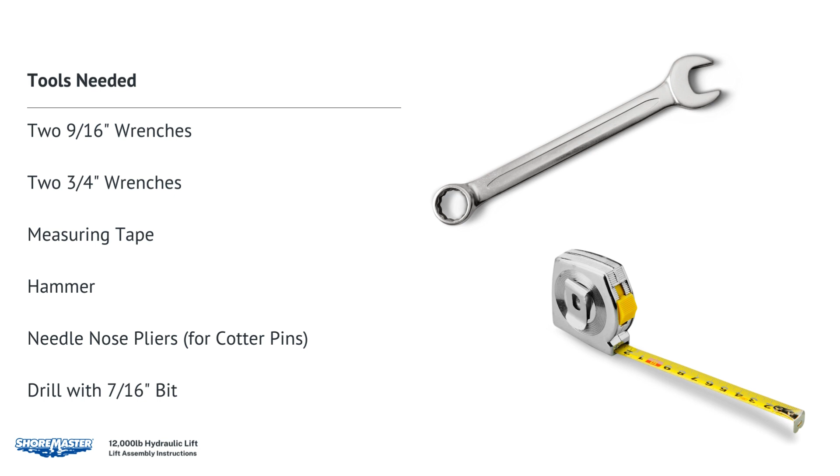Frame assembly instructions. Fully read and understand each step before proceeding. The following tools will be needed for assembling the lift: two 9/16 inch wrenches, two 3/4 inch wrenches, measuring tape, hammer, needle nose pliers for cotter pins, and a drill with a 7/16 inch bit.

Install all 4 leg posts into foot pads. Secure using one 3/8 by 4 hex bolt and one 3/8 brass nut in each place.

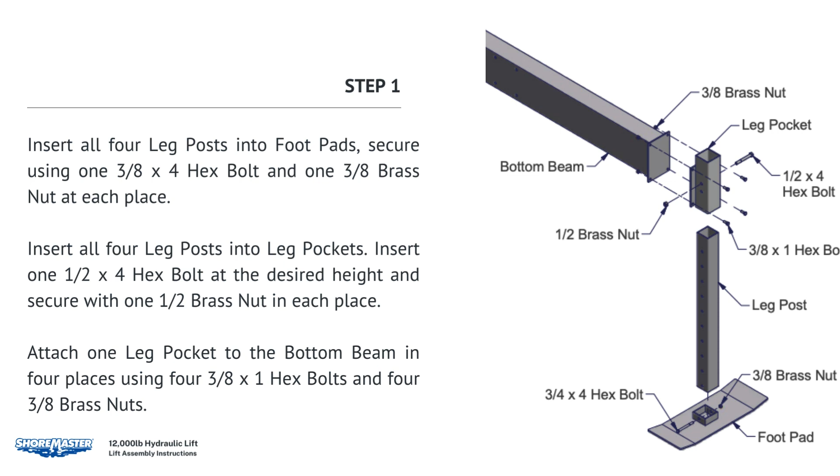Insert all 4 leg posts into leg pockets. At the desired height, insert one 1/2 by 4 hex bolt and secure with one 1/2 brass nut in each place. Attach one leg pocket to the bottom beam in 4 places using 4 3/8 by 1 hex bolts and 4 3/8 brass nuts.

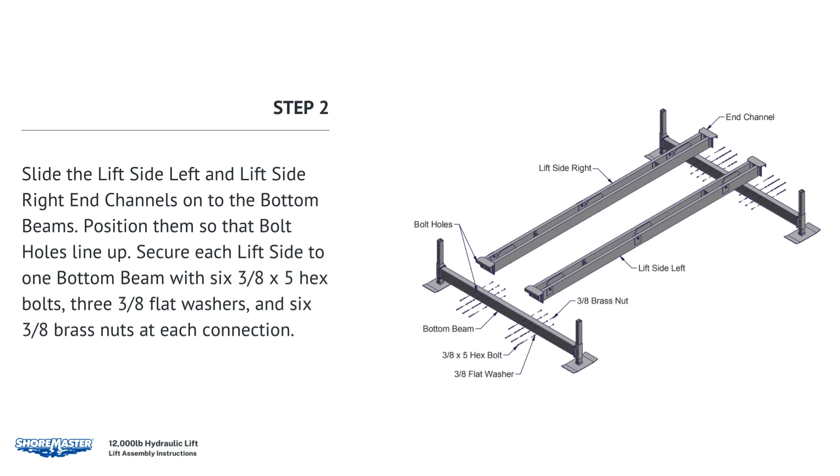Slide the lift side left and lift side right end channels onto the bottom beams. Position them so that the bolt holes line up. Secure each lift side to one bottom beam with 6 3/8 by 5 hex bolts, 3/8 flat washers, and 6 3/8 brass nuts at each connection.

Attach the I-beams to the proper lift sides using 2 5.5 inch pins for each I-beam. Insert one 5/32 by 1 1/2 cotter pin into each pin and bend with needle nose pliers.

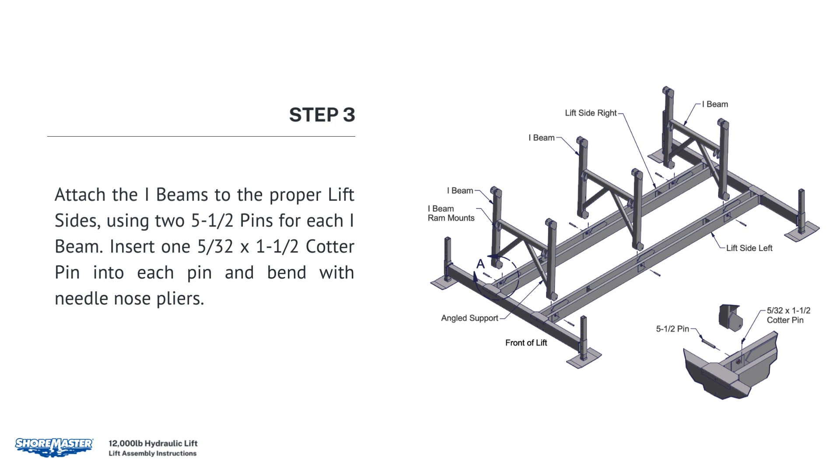Pin the base of each hydraulic cylinder to the lift side ram mounts using one 6.0 pin and one 5/32 by 1 1/2 cotter pin in 6 places. Bend cotter pins with needle nose pliers after installation.

Pin the top of each hydraulic cylinder to the I-beam ram mounts using one 4.5 pin and one 5/32 by 1 1/2 cotter pin in 6 places. Bend cotter pins with needle nose pliers after installation.

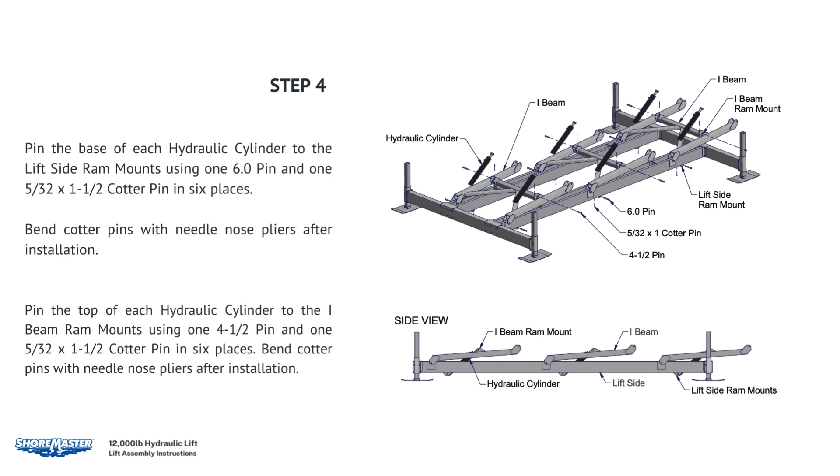Attach each rack side to the I-beams using 2 5.5 pins and 2 5/32 by 1 1/2 cotter pins. Bend cotter pins with needle nose pliers after inserting.

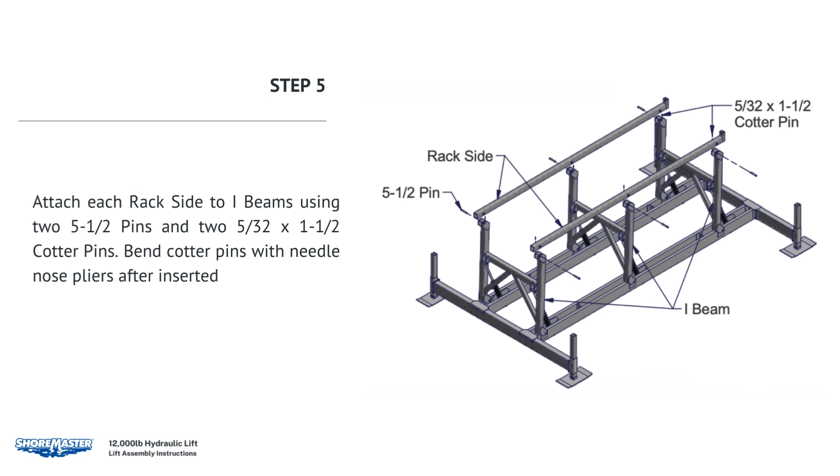Slide each V-rack onto the rack sides. One 7/16 inch hole will need to be drilled in the rack side for each V-rack connector channel. Secure with one 3/8 by 4 bolt and one 3/8 brass nut in each place.

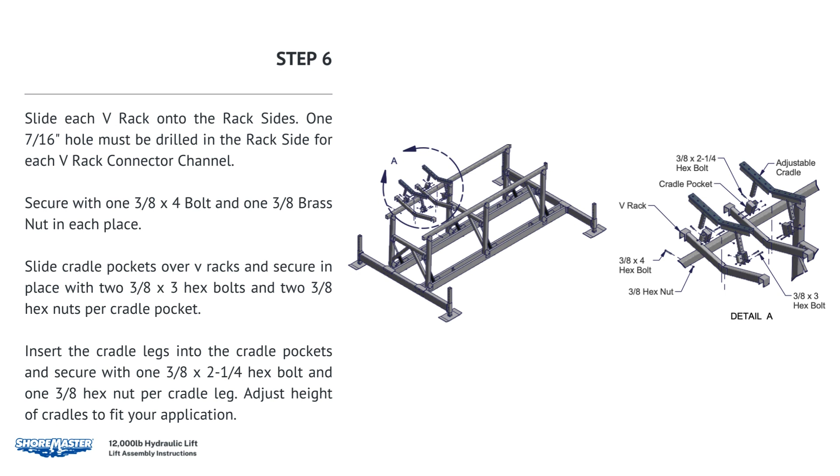Slide cradle pockets over V-racks and secure in place with 2 3/8 by 3 hex bolts and 2 3/8 hex nuts per cradle pocket. Insert the cradle legs into the cradle pockets and secure with one 3/8 by 2 1/4 hex bolt and one 3/8 hex nut per cradle leg. Adjust the height of the cradles to fit your application.

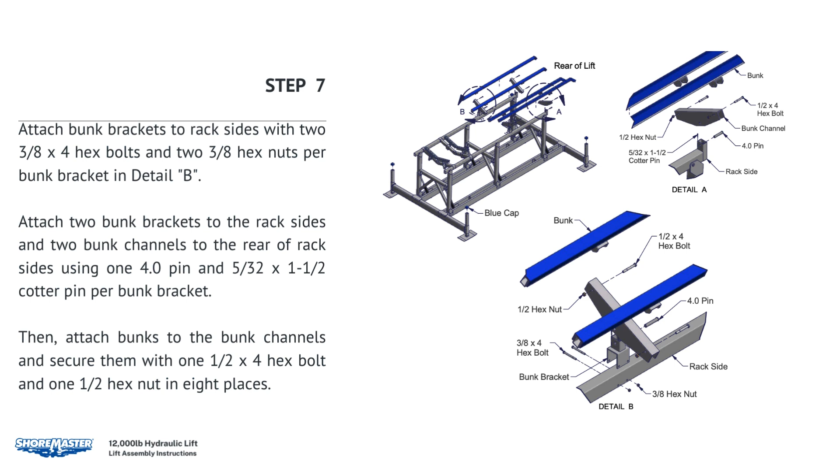Then attach bunks to the bunk channels and secure with one 1/2 by 4 hex bolt and one 1/2 hex nut in 8 places.

Installation instructions. Situations will widely vary between installation sites. ShoreMaster recommends that your dealer or other trained boat lift installer train you and perform the initial installation. The following are guidelines or suggestions for installation.

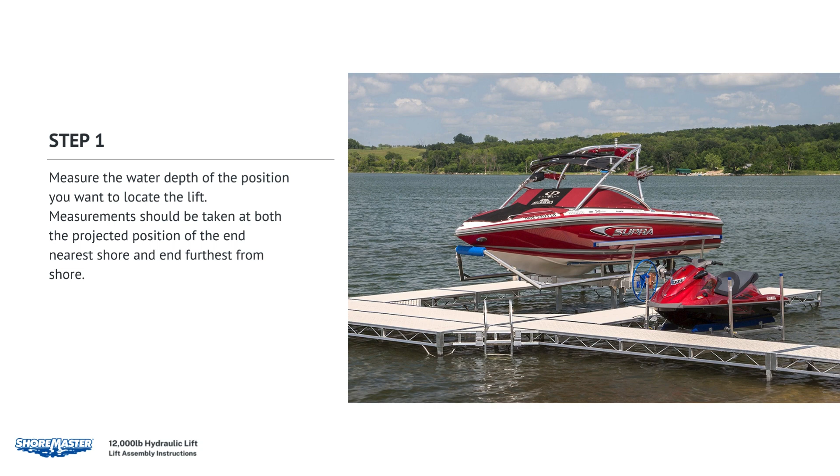Measure the water depth at the position you want to locate the lift. Measurements should be taken at both the projected position of the end nearest shore and the end furthest from shore.

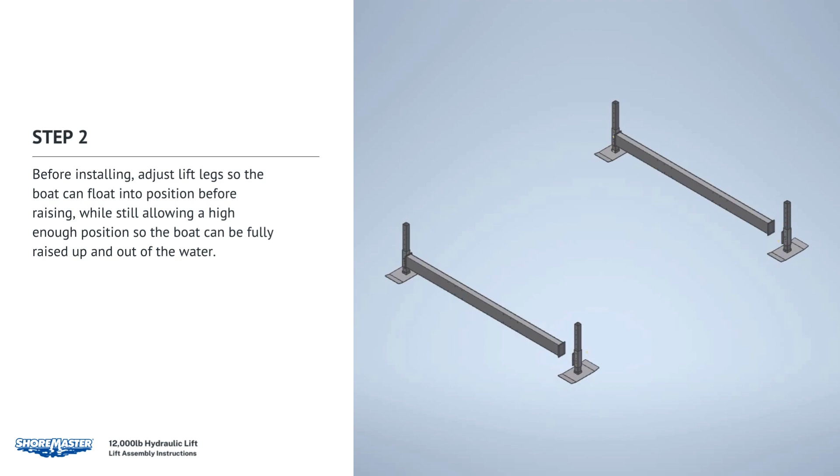Before installing, adjust the lift legs so that the boat can float into position before raising, while still allowing a high enough position so that the boat can be fully raised up and out of the water.

Carefully place the lift into position alongside the dock so that the hydraulic pump and operating controls can easily be set on the dock. Ask your dealer about a wheel caddy unit to allow your lift to be rolled into position.

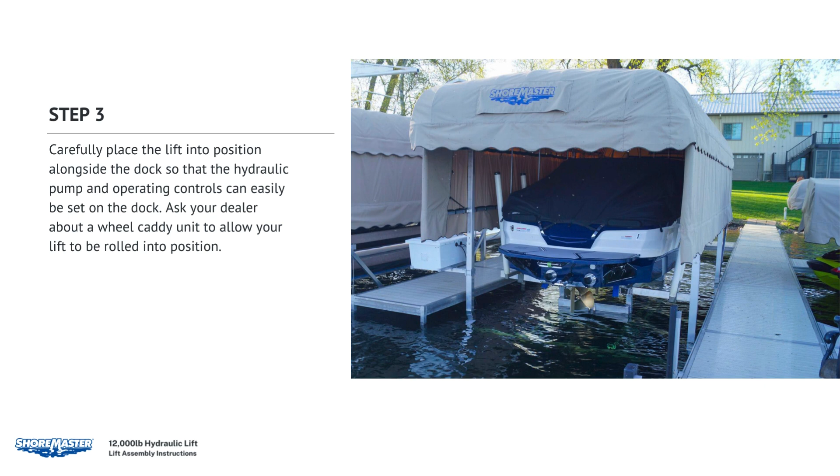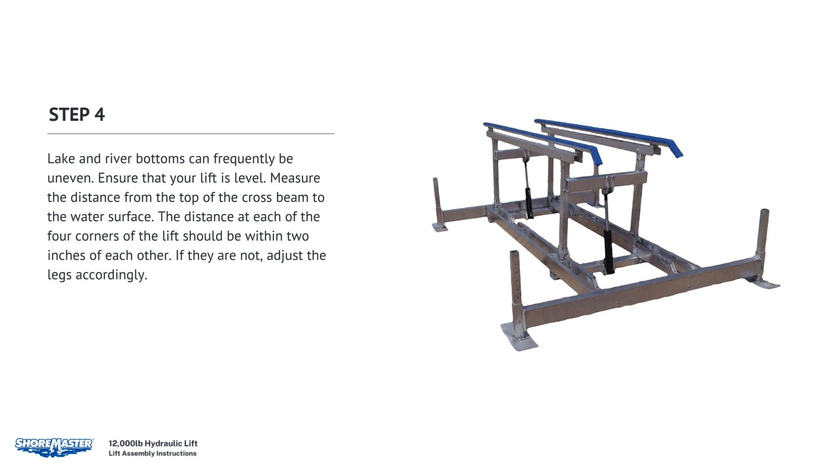Lake and river bottoms can frequently be uneven. Ensure that your lift is level. Measure the distance from the top of the crossbeam to the water surface. The distance at each of the four corners of the lift should be within 2 inches of each other. If they are not, adjust the legs accordingly.

After loading and operating the lift, following the operating instructions. Remove the boat and recheck that the lift remains level.

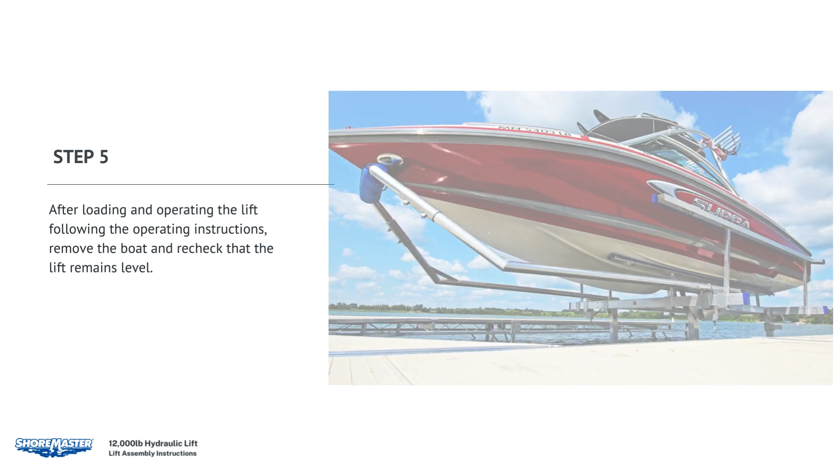Operating instructions. Now that you have installed and leveled the lift, you are ready to raise your boat for the first time. Prior to use, see to it that anyone who may use the lift looks upon the unit not as a toy, but as a piece of heavy equipment that deserves your respect and good judgment.

Before allowing anyone to operate the lift, be sure they fully understand the proper operating procedure. Do not exceed maximum capacity of the lift. Overloading may cause mechanical failure and serious personal injury. Do not allow anyone who is in the water within 6 feet of the lift. Do not allow anyone on, in, or under the lift while operating.

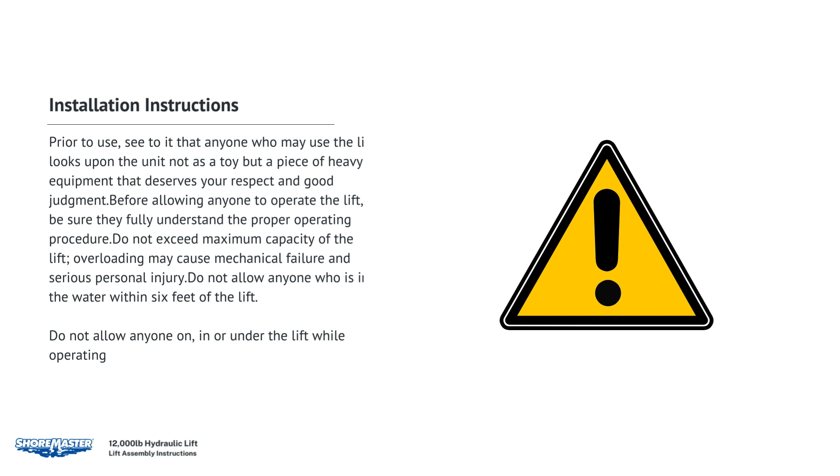When operating the lift, the following procedures must be adhered to. Be sure the cradles or bunks, sold separately, are positioned below the water surface so they will not interfere with the boat floating into position.

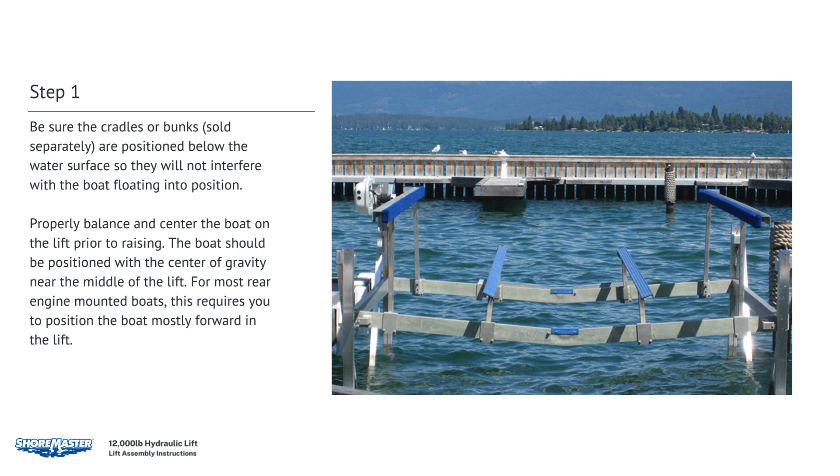Properly balance and center the boat on the lift prior to raising. The boat should be positioned with the center of gravity near the middle of the lift. For most rear-engine mounted boats, this requires you to position the boat mostly forward in the lift.

Carefully bring the lift up until the bunks or cradles have secured the boat. Then, stop the lift and check to see that the bunks or cradles have automatically positioned themselves to the shape of the hull, as they are designed to do.

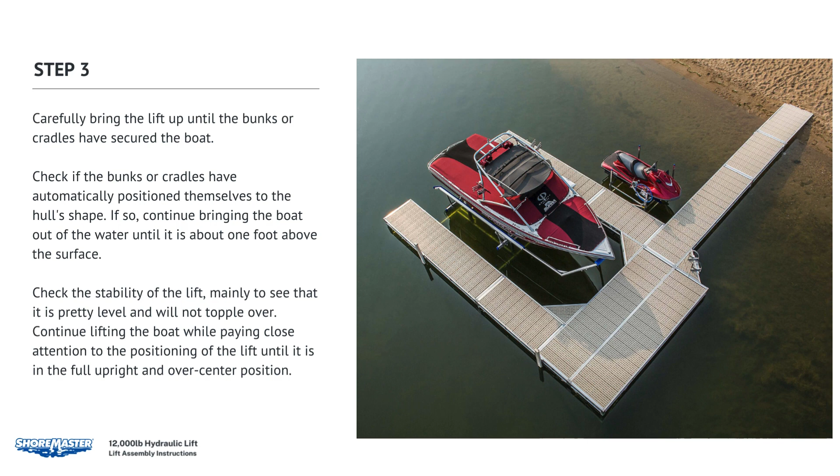If so, continue bringing the boat out of the water until it is about 1 foot above the surface. Stop the lift again and check the stability of the lift, particularly to see that it is fairly level and will not topple over. Finally, continue lifting the boat while paying close attention to the positioning of the lift until it is in the full upright and over-center position.

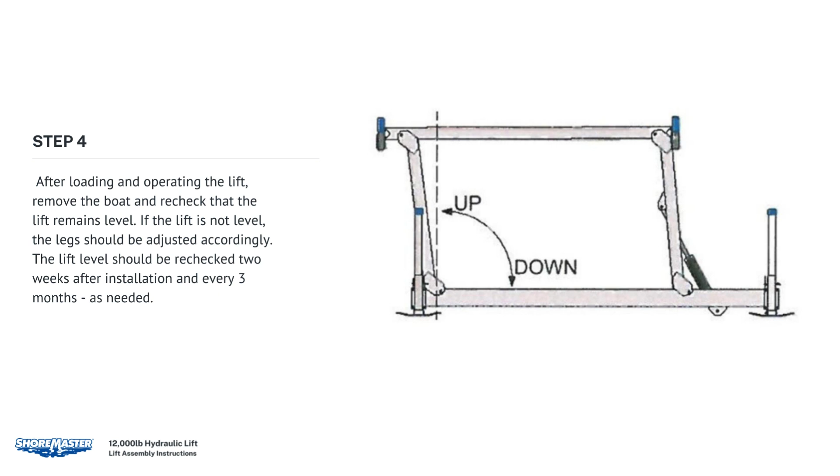After loading and operating the lift, remove the boat and recheck that the lift remains level. See Step 4 of the installation instructions previously discussed. If the lift is not level, the legs should be adjusted accordingly. Because the lift may settle and become unbalanced, the lift levelness should be rechecked 2 weeks after installation and periodically as needed.

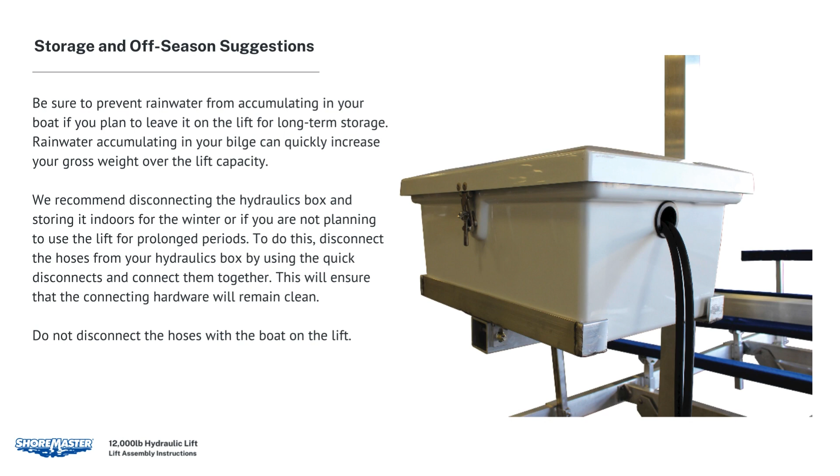Storage and off-season suggestions. Be sure to prevent rainwater from accumulating in your boat if you plan to leave it on the lift for long-term storage. Rainwater accumulating in your bilge can quickly increase your gross weight over the lift capacity.

Always adjust the lift's height to limit wave action against the hull. A moving boat because of wave action will damage the lift and can take the boat off of the lift.

ShoreMaster recommends disconnecting the hydraulic box and storing it indoors for the winter, or if you are not planning to use the lift for prolonged periods. To do this, disconnect the hoses from your hydraulic box by using the quick disconnects and connect them together. This will ensure that the connecting hardware will remain clean.

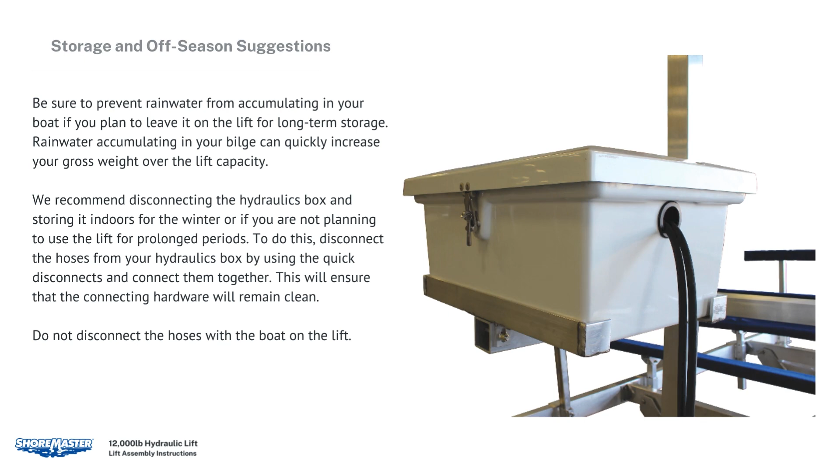Booster charge your battery using a 10-amp charger at the beginning and the end of the season. A mid-season boost may be required for heavy use. Prior to performing a booster charge, see the battery tips section of the hydraulics box instructions, included with hydraulic box or available on the ShoreMaster website.

If your waterway freezes during the winter, you will need to remove your lift as it can be damaged by ice flows. When storing the boat, the lift must be in the upright, over-center gravity lock position for maximum safety. The over-center position will prevent the boat from lowering if you experience a hydraulic leak or slippage. Your lift can be left in any position when not in use.

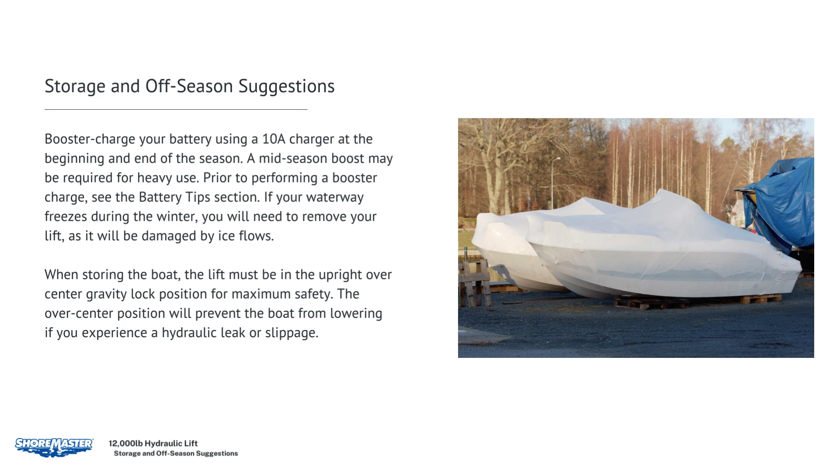Without a boat on the lift, although we do recommend leaving the lift in the up position to prevent the bunks from becoming slimy and to avoid creating a hidden underwater obstruction.

Each spring and fall, inspect nuts and bolts for damage, wear, or loose connections. At the same time, inspect the frame and pivot points for unusual wear, damage, or bent parts. Tighten, repair, or replace parts as needed.

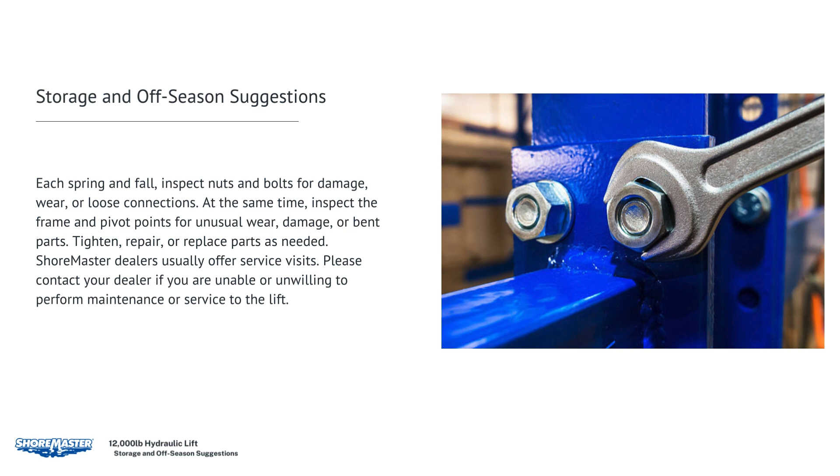ShoreMaster dealers usually offer service visits. Please contact your dealer if you are unable or unwilling to perform maintenance or service to the lift.